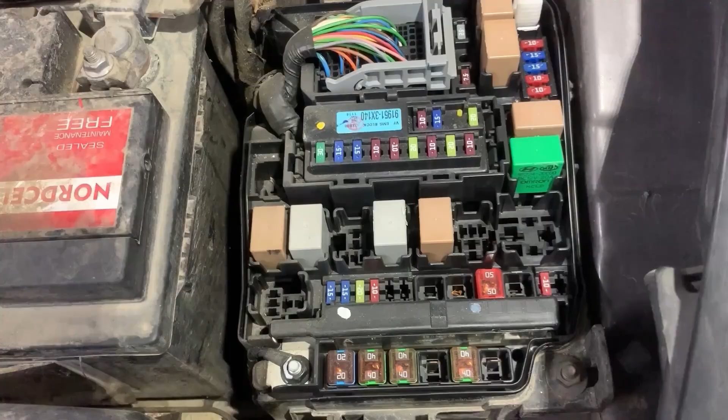Before I show you the location of the fuses, first I'm going to show you how to test them using a test light and a multimeter. First I'll show you with a test light. In order to test the fuses with a test light, we need to turn the ignition on.

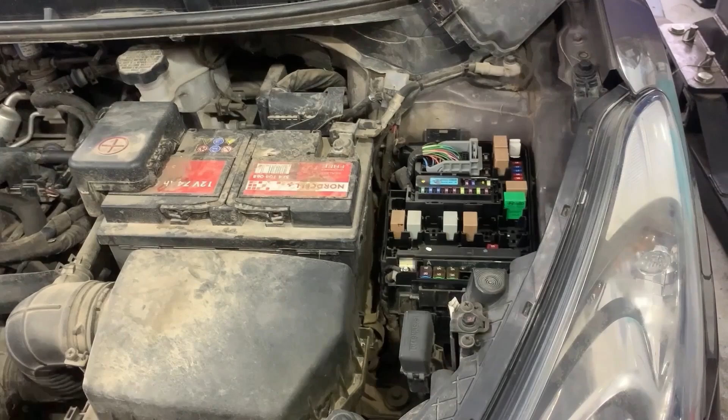This is the test light that I'm going to be using. You need to put the other end of the cable onto battery negative or chassis ground. In my case I'm going to put it on battery negative.

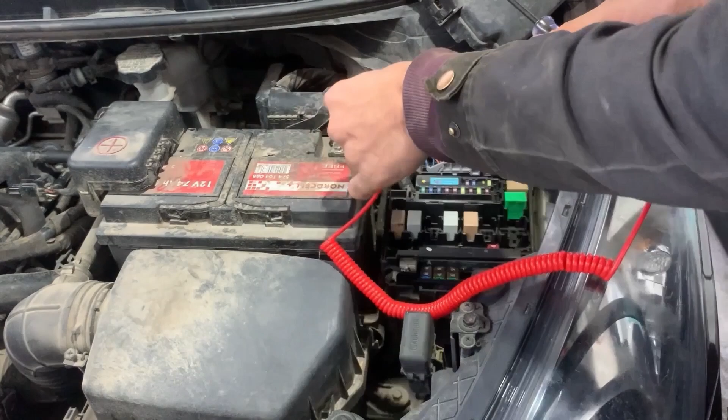So these are the fuses that I'm going to be testing. On each side of the fuse there is a pin that we need to touch with the test light, and they should both light up. If one lights up and the other doesn't, that means the fuse is blown. If they both light up, that means the fuse is good.

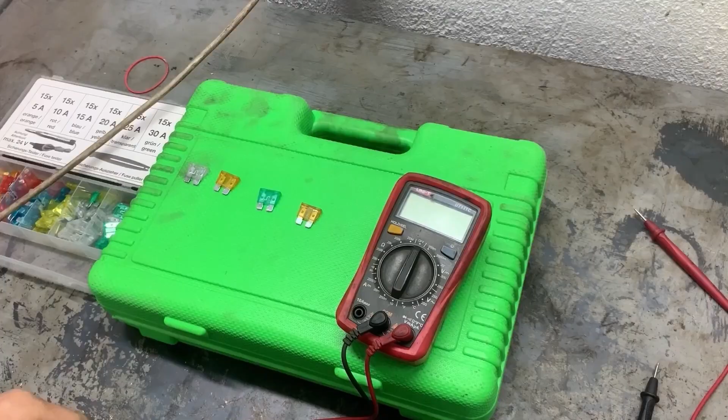Next we're going to test fuses with a multimeter, to see if they are good or bad. This is what the fuse looks like, and this is the contact in the middle that connects to the two pins. If the contact is connected, that means the fuse is good. If it's burnt, that means there is an open circuit on the fuse and the fuse is blown.

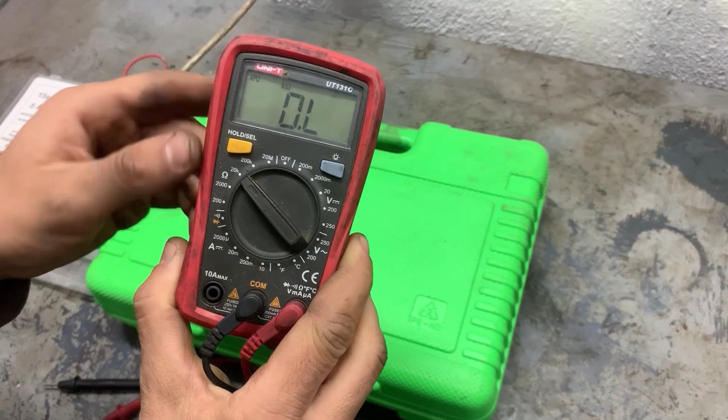So in order to check the fuses, we need to measure the resistance. Turn the multimeter on to 20k ohms and we'll start measuring. When measuring the resistance of the fuses, the resistance has to be very close to zero.

First we'll check the resistance of the two cables - it has to be zero as well. Now we'll start testing the fuses. If it shows something close to zero, the fuse is good. If it doesn't show anything, that means the fuse is blown off. If it shows a lot of resistance, the fuse is also not good.

The first one showed 0, the second one also shows 0 ohms, the third one shows 0 ohms, and the fourth one shows open circuit. It doesn't show any ohms, nothing is changing. That means this fuse is blown.

Now we see what the condition of the fuse is visually. We can see that the contact in the middle is not connected to the two pins, so that's why it doesn't show any resistance, because it's an open circuit.

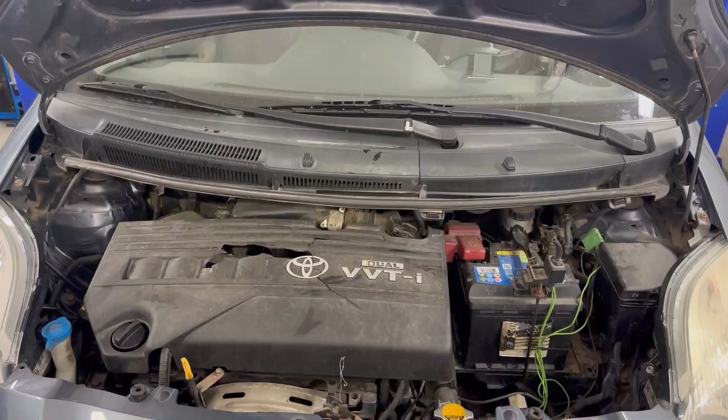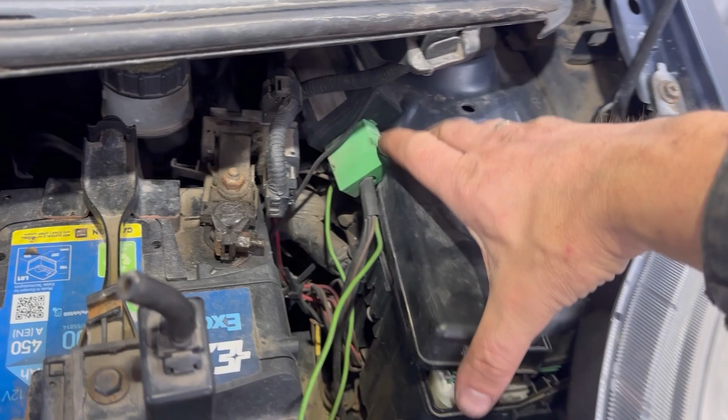Next I'll show you the location of all the main fuse boxes for this Toyota Yaris. There are two main fuse boxes on this car. One of them is in the engine bay area, right underneath this plastic cover. We need to remove that cover and we'll see the fuse box in the engine bay.

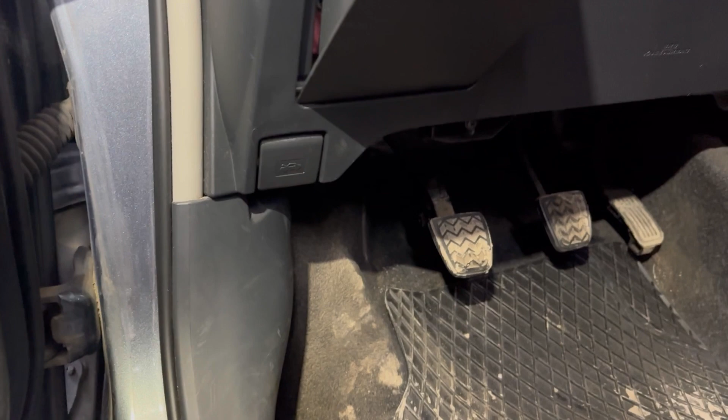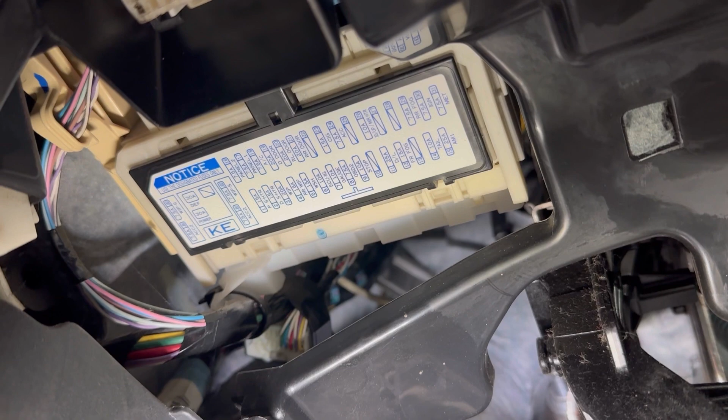Next I'll show you the other main fuse box. It's in the fascia, underneath the dashboard and underneath the steering wheel. We'll go just underneath the dashboard and we'll see it, right there underneath this white cover. We need to remove that cover, and that's the fuse box right there.

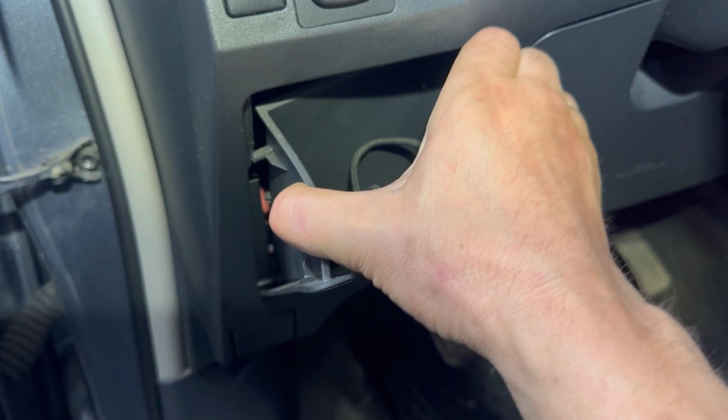There's another part to this fuse box, located behind this pocket. We need to remove this pocket just by pulling it out, and we'll see the other part of the fuse box right there.

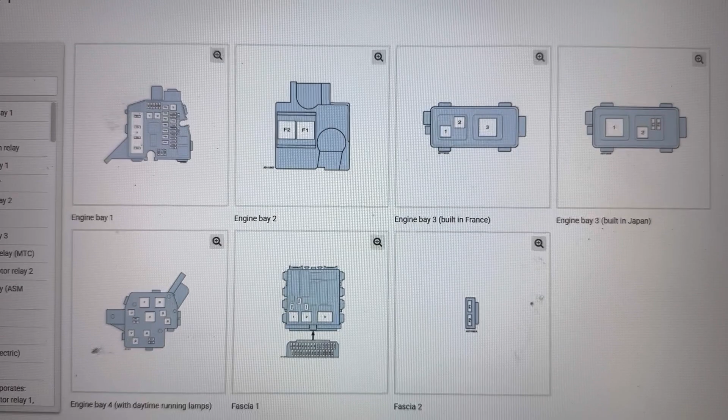Next I'll show you in the service manual all the fuse boxes for this Toyota Yaris. We can see there are the two main fuse boxes, and some smaller fuse boxes around the car, and on the left are all the fuses in those fuse boxes.

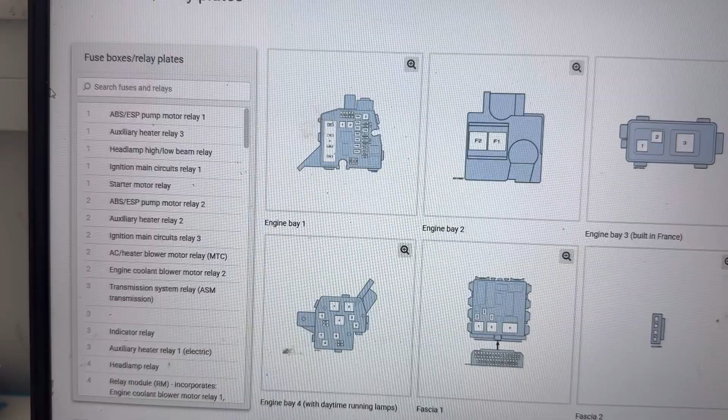In the search tab we're going to type headlights, to show us all the fuses and relays for it. We can see there are a couple of relays and a couple of fuses, all located in the engine bay and fascia fuse box.

First I'll show the location in the engine bay fuse box: F10 10 amp fuse, F11 10 amp fuse, F19 30 amp fuse.

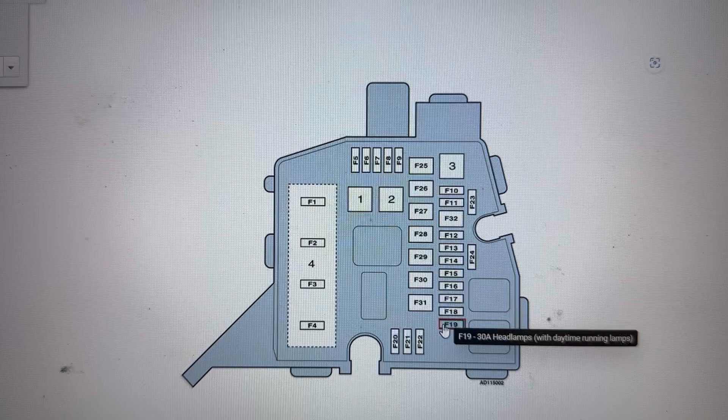Next I'll show you the location of the relays in the engine bay fuse box: number 1 relay, number 4 relay, F3 10 amp fuse, F4 10 amp fuse.

Next I'll show you the location of the fuses in the fascia 1 fuse box, and the fuse there is F1 7.5 amp fuse.